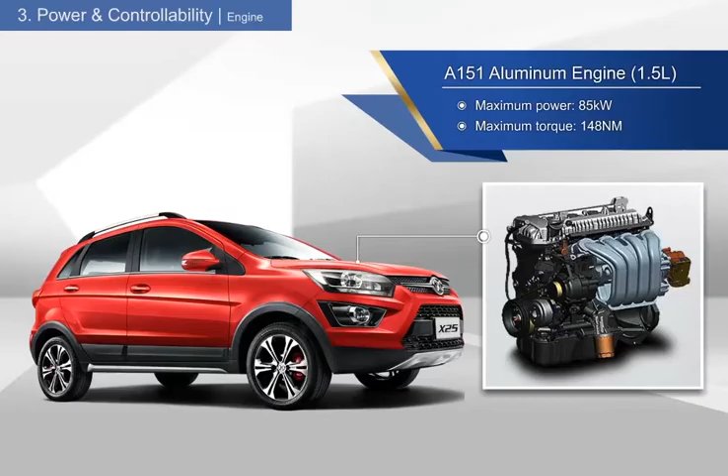The X25 adopts a 1.5-liter A151 high-performance all-aluminum engine made by BAIC. This engine is characterized by high fuel efficiency and strong power output. The engine can produce a maximum power output of 85 kilowatts and a maximum torque of 148 Newton meters, with obvious advantages compared to other vehicles of the same segment.

The A151 also adopts lightweight design, intake VVT control, low friction, variable length intake manifold, and other core engine technologies. With engine VVT technology, the intake air volume and valve timing can be adjusted to the best situation according to the engine operating condition, thus improving fuel efficiency effectively.

The variable length intake manifold changes the intake pipe length to ensure the best air supply is always reached, whether the engine is at high or low speed. This improves the fuel efficiency of the engine. It can achieve greater stability and more ample torque at low speed, and greater smoothness and larger power output at high speed.

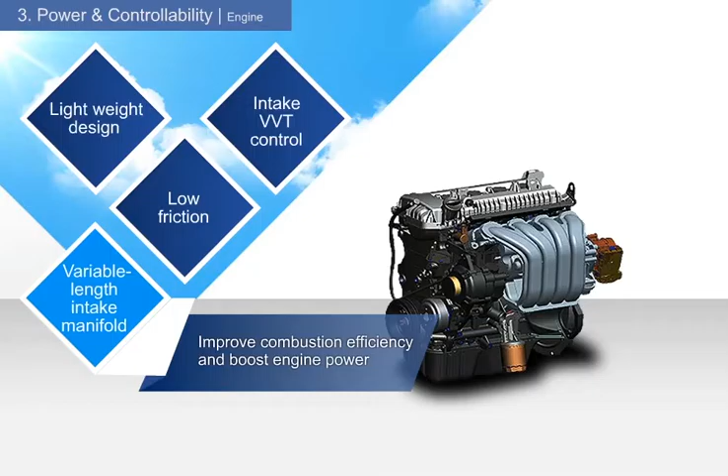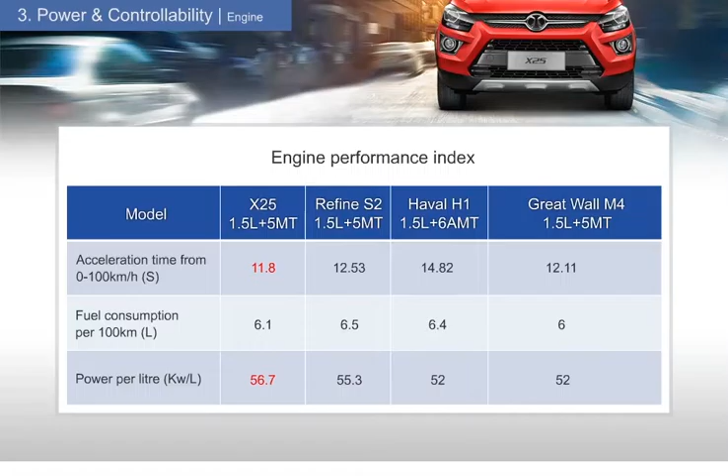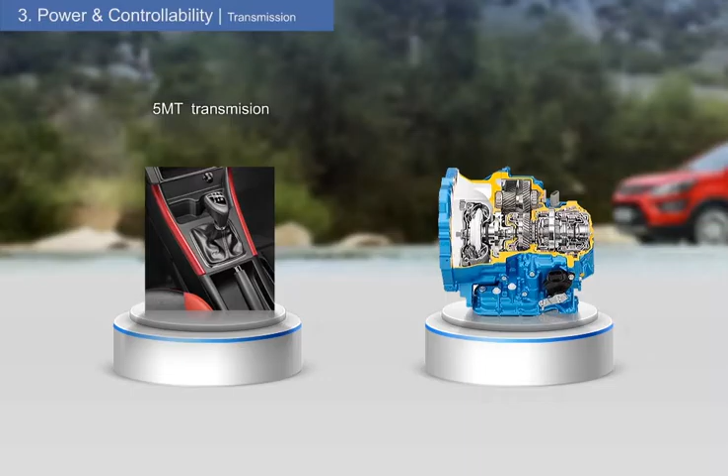Practice shows that the engine equipped on the X25 produces far better performance indicators than engines of other vehicle models of the same segment do. In particular, the X25 performs outstandingly in terms of 0 to 100 km per hour acceleration time and power per liter. To meet different customer needs, the BAIC X25 provides 2 transmissions, 5MT and 4AT.

The 5MT transmission is a homemade transmission in China. In addition to the functions of a conventional transmission, the 5MT is also equipped with a smart shifting MT system, namely the shift reminder function. The role of this function is that it can issue an upshift or downshift prompt based on comprehensive engine and vehicle speed computations and current shift. It can provide assisted driving and make driving more convenient.

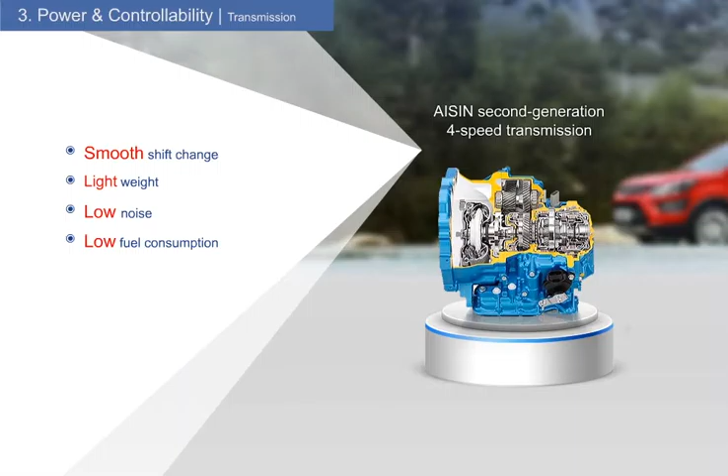The automatic transmission of the X25 adopts an Aisin second-generation 4-speed transmission. Aisin is an internationally known transmission brand, and its transmissions are characterized by smooth shift change, light weight, low noise, and low fuel consumption. Aisin transmissions are highly popular with various car makers. Almost all models of the famous car maker Toyota are equipped with an Aisin transmission.

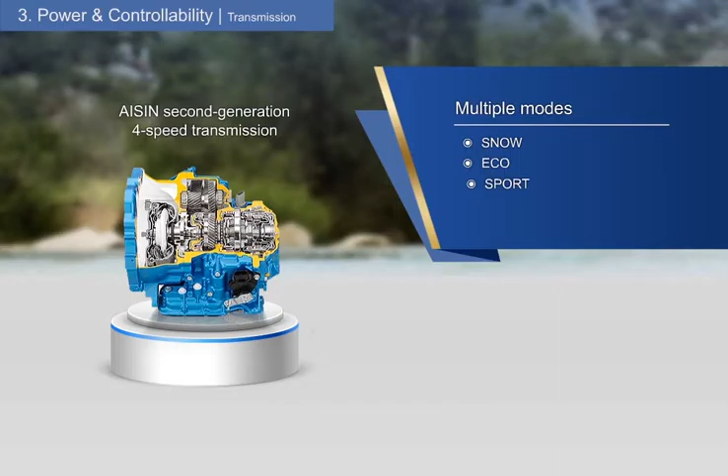The Aisin second-generation 4-speed transmission offers 4 work modes, which are respectively Snow, Eco, Sport, and Cruise. Based on different road conditions, the driver can select different work modes via the selection button near the shift lever.

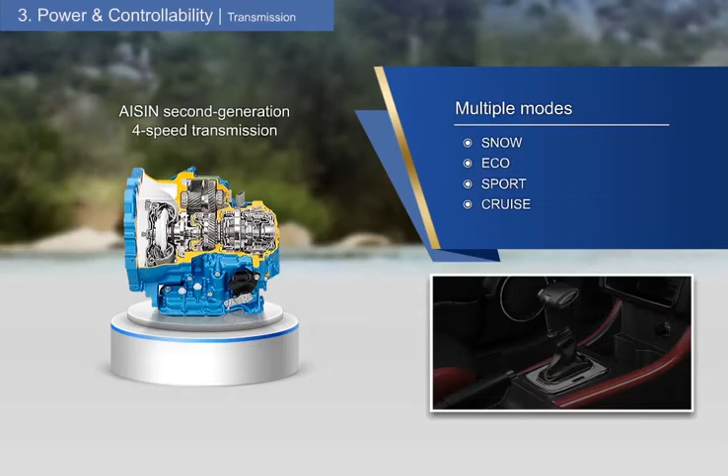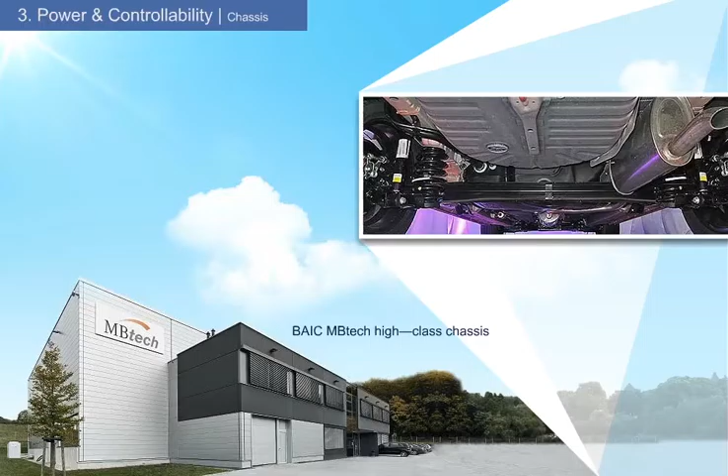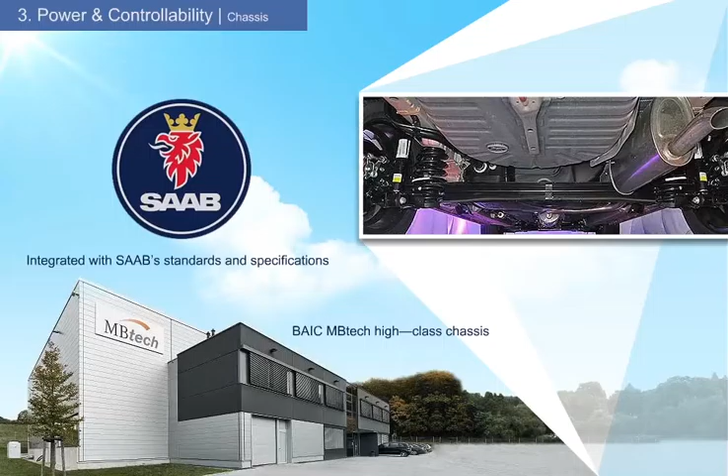We know that the X25 comes from the BAIC MBtech chassis platform. The BAIC MBtech Development Center is BAIC's most important, most advanced technology research center. It provides technical services to all the Chinese brands under BAIC. BAIC MBtech carries forward a driver-centered car-making philosophy and aspires to provide mature, advanced technologies. Meanwhile, the X25 is integrated with Saab's design standards, development processes, and verification specification to improve vehicle development quality and provide extraordinary driving fun.

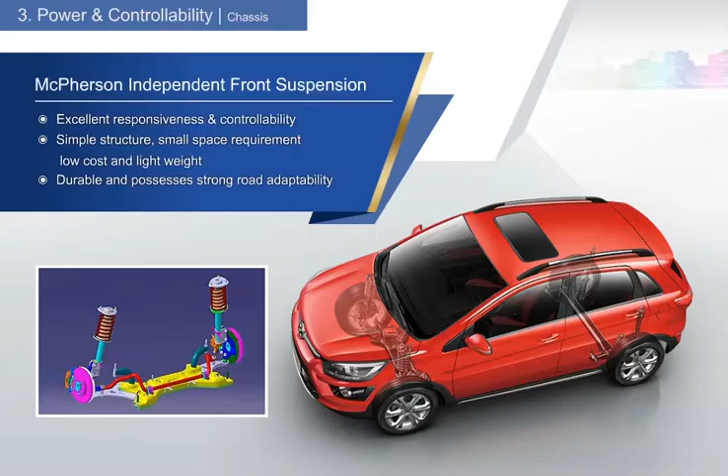The X25 adopts a McPherson independent suspension as its front suspension. The McPherson suspension offers excellent responsiveness and controllability and is characterized by simple structure, small space requirement, low cost, and light weight. Meanwhile, it possesses strong road adaptability. Many well-known brand sedans all adopt a McPherson independent suspension as their front suspension.

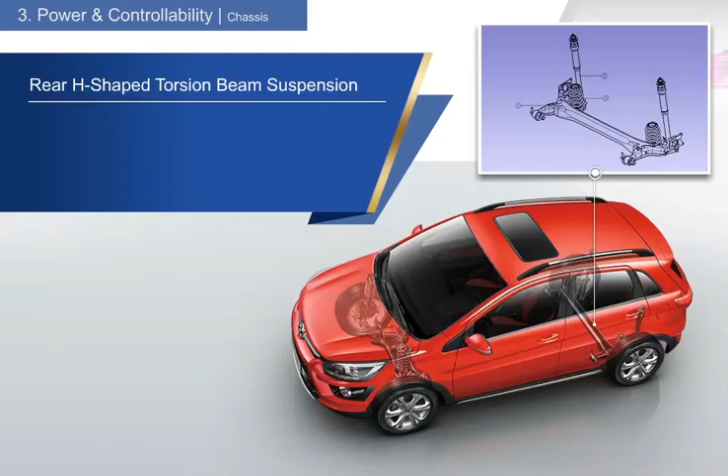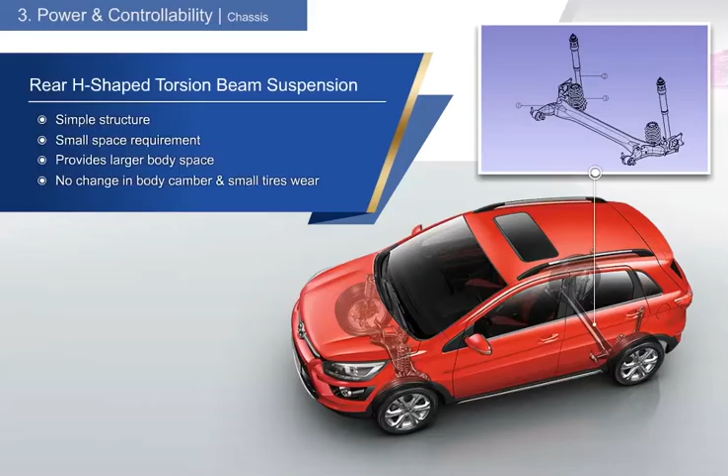The X25 adopts an H-shaped torsion beam suspension as its rear suspension. The torsion beam suspension offers swift control and has a simple structure. It occupies little space. It can provide a larger body space to the vehicle. It can well filter out minor vibrations and shocks, making body camber changes difficult to happen. Therefore, it can both improve driving comfort and reduce tire wear.

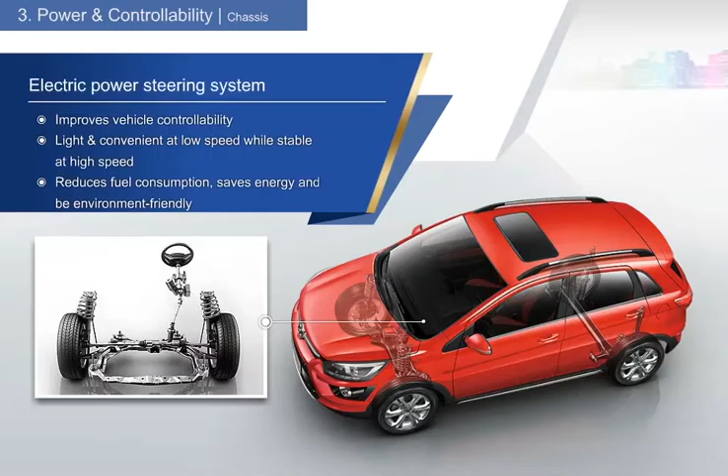The X25 is the first among small SUVs to adopt a fairly advanced electric power steering system to enhance vehicle controllability. The electric power steering system utilizes the power generated by the motor to help the driver to steer. It can easily provide different power steering effects according to different vehicle speeds, so as to ensure easy and flexible vehicle steering at low speed, as well as steering stability and reliability at high speed. The electric power steering system can reduce fuel consumption, save more energy, and achieve greater environment friendliness.

The X25 possesses excellent active and passive safety measures to perfectly combine comfort with safety. Before we start to learn about the safety devices of the X25, we need to know the concepts of active safety and passive safety. Then, what is active safety and what is passive safety?

The role of active safety configurations is to prevent accidents from happening. These are systems which use monitoring equipment to monitor the surrounding road condition or vehicle information while driving and provide alarm signals to alert the driver. ABS, EBD, and high-mount stop lamps, which we are familiar with, all belong to active safety devices.

Passive safety configurations are safety configurations which prevent harm to onboard interior personnel after accidents have happened. Bumpers, airbags, and seatbelts, which we often see, are passive safety devices.

To ensure driver and passenger safety, the BAIC X25 is equipped with advanced, reliable safety systems. ABS and EBD from Bosch version 9.1 can exert best control on the braking force of each wheel and ensure vehicle braking safety in the event of emergency braking or sharp cornering.

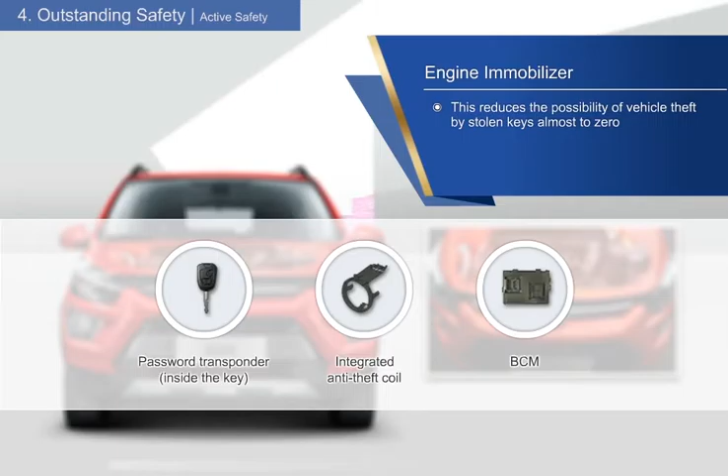When the vehicle is started, the engine will activate the coil on the ignition lock head via the onboard network. It will identify whether the chip on the key is expected. If the key is confirmed as lawful, the engine will start. Otherwise, the controller will not inject fuel and make it impossible to start the vehicle.

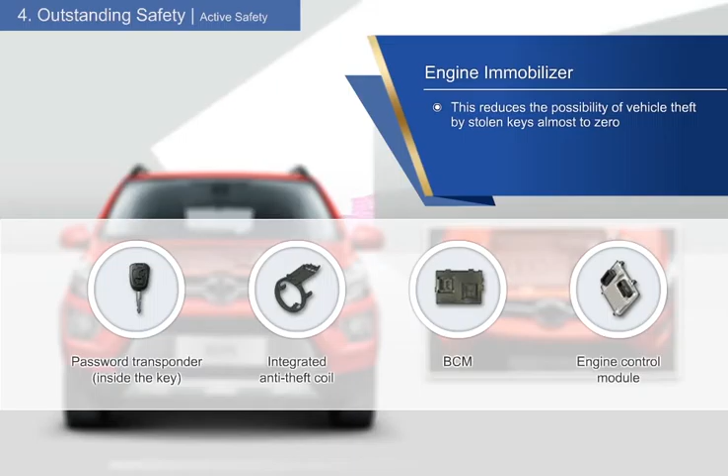The automatic unlocking function ensures that when there is a car collision, the ECU can quickly get collision information under the action of sensors and concurrently issue an instruction to unlock the 4 doors. This facilitates the driver and passengers to escape.

A disc brake is adopted on all 4 wheels of the X25. The disc brake makes faster braking response and offers outstanding braking stability and excellent heat diffusion. It can provide good protection to the driver and passengers at any time.

There are 3 round points on the rear bumper. These are 3 reversing radar probes. The rear parking radar monitors the state around the parked vehicle, accompanied by a 4-segment audible alarm. As an obstacle approaches closer, the alarm sound frequency will be higher and higher. It can help the driver to know the distance between an obstacle and the vehicle and improve driving safety. It is very practical in complicated or dim environments.

The X25 is equipped with a best-in-class energy-absorbing body with wide use of high-strength steel. The body adopts a closed-force transmission path design and can effectively absorb collision energy and disperse it to all position frames of the vehicle when there is a vehicle collision. This reduces cabin deformation and protects driver and passenger safety.

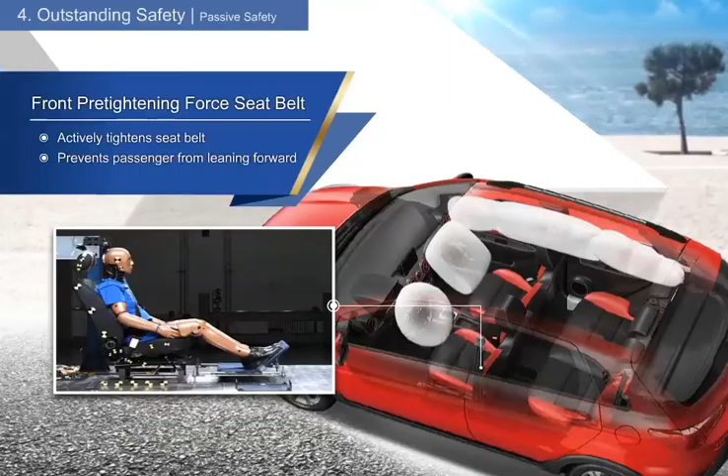We all know that the steering wheel is a plane. However, a column is connected under it. It is called the steering column. Upon impact, a collapsible steering column can crumple into several segments according to the prior design. This prevents the steering column from moving to the cabin and therefore protects driver safety.

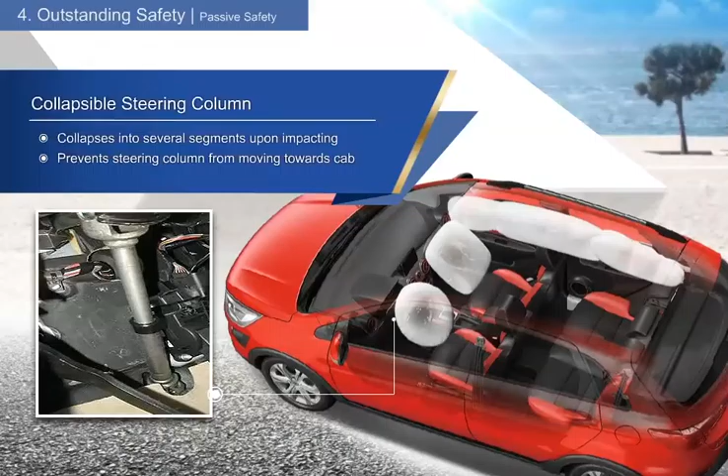Each rear seat is also equipped with an ISOFIX fixture device. With an internationally general-purpose standard interface, the ISOFIX can fix a baby seat to the rear seat and therefore greatly improve child safety.

The smart technology configurations of the X25 are also full of highlights.

A 7-inch display screen is a major highlight of the X25. It not only makes the entire interior look more stylish and luxurious, but is also integrated with various functions. The display screen can display reversing images and clearly show the situation behind the vehicle. This helps the driver to accurately know the road condition behind.

Meanwhile, the display screen is also integrated with a Bluetooth communication system. It means that the driver can take calls while driving with no distraction of attention. All the driver needs to do is to press a button or exercise voice control to take calls. This greatly improves driving safety and convenience.

In combination with the intelligent onboard voice system, the display screen can display navigation maps, and the driver can easily reach the destination via the navigation system.

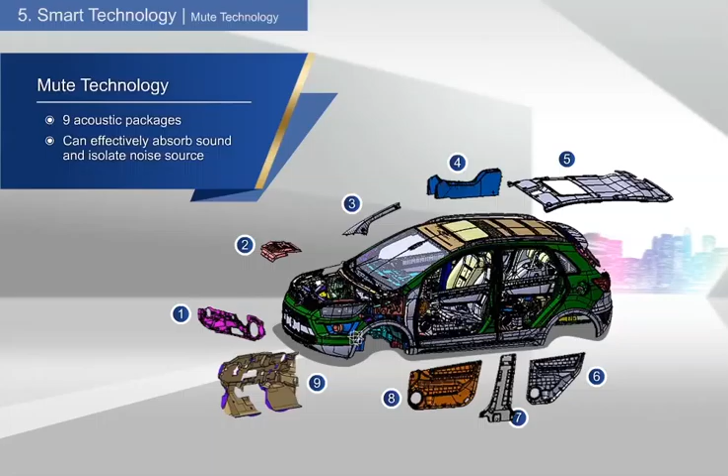The acoustic package is an important component which affects the interior acoustic characteristics of a vehicle. Acoustic packaging has been designed for a total of 9 positions on the X25. All these packages can effectively absorb sound, isolate noise source, adjust interior sound quality, and improve vehicle comfort.

Lack of ventilation, and interior material texture can cause poor air quality and strong odor inside a vehicle, and may even affect human health. The X25 strictly implements China's passenger vehicle interior air quality evaluation standard to comprehensively lower the level of total volatile organic compounds inside the vehicle, bring its VOC content far below the international limiting values, and maintain its interior air quality at a standard healthy level.

Up to this point, we have completed the current course. Through the course, I believe that you now understand the background and positioning of the X25 and have mastered all its highlights in design, power and controllability, outstanding safety, and smart technology. It is hoped that all these knowledge points will help to improve your work performance.